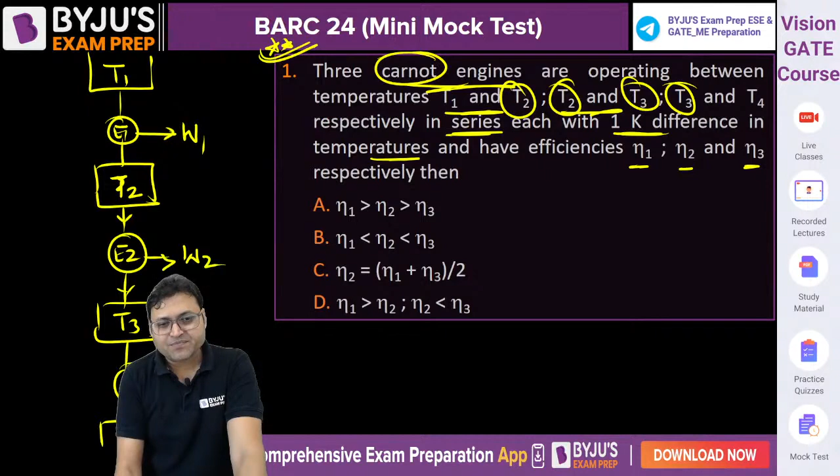So what is the thermal efficiency of an engine? The thermal efficiency is given by the work output upon heat input. What will be the thermal efficiency? Net work output upon heat supplied.

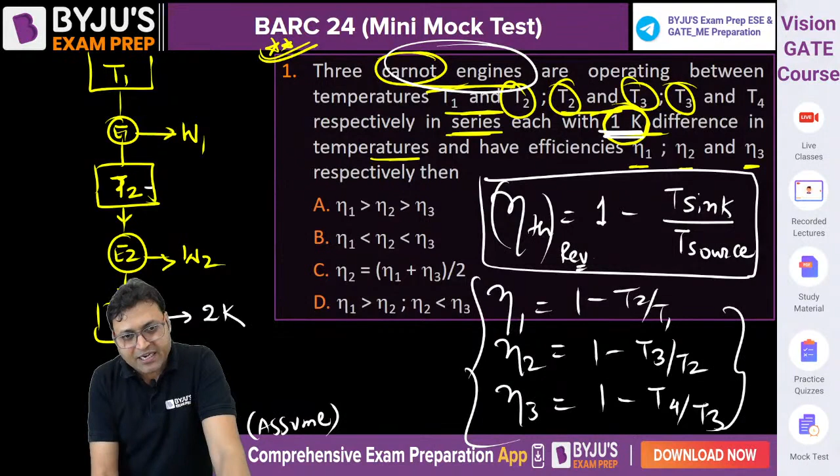Thermal efficiency for the engine 1, then what will be the answer? For engine 1, thermal efficiency क्या होगा? 1 minus T2 by T1, 3 by 4. Efficiency of 2 होगा 1 minus T3 by T2, that is 2 by 3, and thermal efficiency for the third engine will be 1 minus 1 by 2.

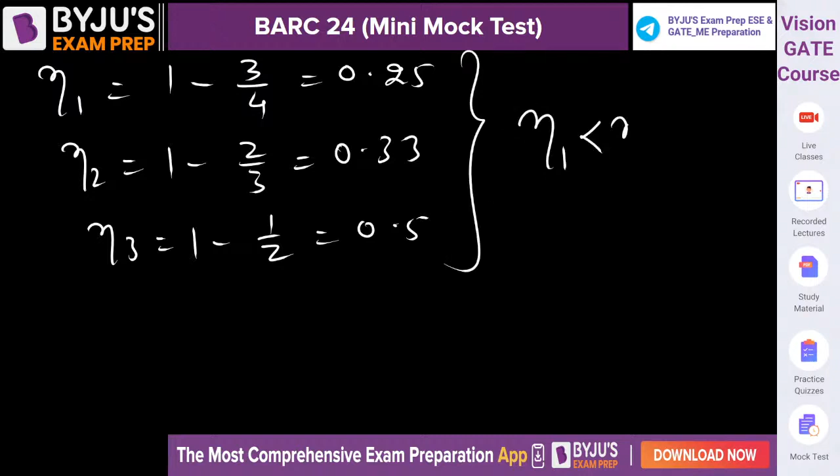Is this all clear to everyone? So the correct option is option B. Is this clear? Give me yes, everybody.

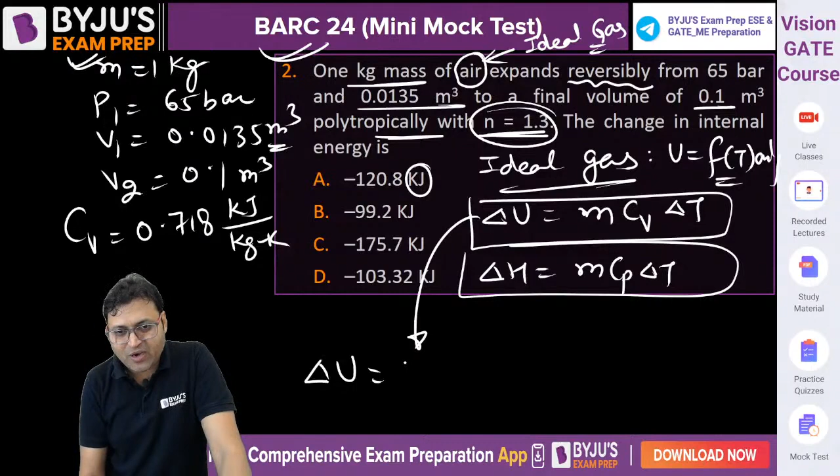T1 कैसे मिलेगा? P1 V1 is equal to m R T1. So from here T1 will be equal to P1 V1 upon m into R. Pressure at 1 क्या है? 65 बार. 65 into 100 किलो पास्कल. 1 बार is equal to 10 to the power 5 पास्कल, into V1. वॉल्यूम 1 क्या है? 0.0135. m R कितना होता है?

0.287. What is the value of R? R will be equal to 0.287 kilojoule per kg Kelvin. So the temperature T1 will come out to be, what is the value of T1? Are you getting 305.8 Kelvin? Please do let me know.

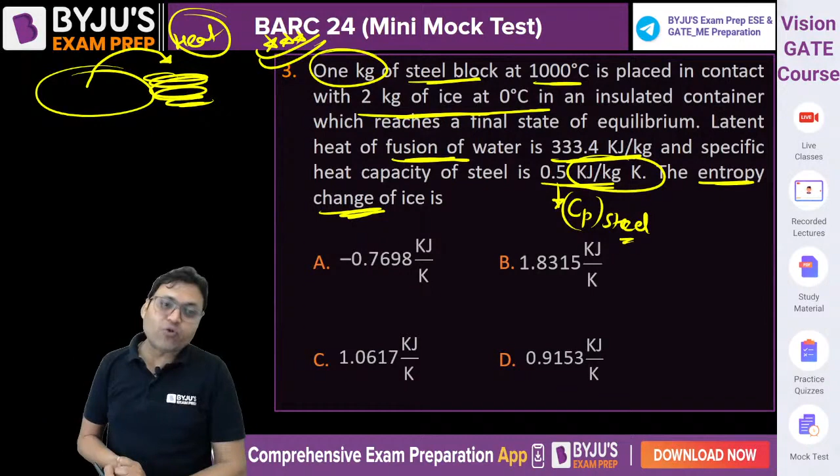If heat supplied by the steel block is more than the heat required for complete conversion of ice into water, then what will happen? After the ice completely gets converted into water, the extra heat will heat the water beyond 0 degree Celsius. So the final temperature of the water will not be 0. So the first step is, let us find out heat required for complete conversion of ice into water.

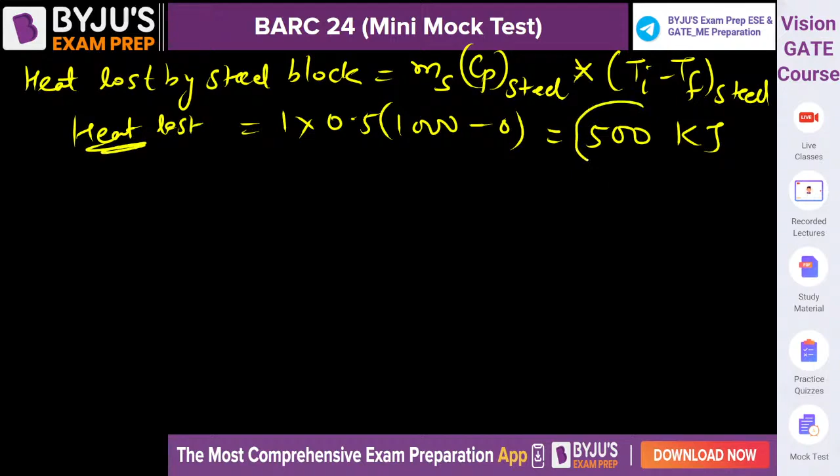अब ध्यान दीजिए कि heat lost by the steel block is 500 and heat required for the complete conversion of ice into water will be 666.8 kilojoule. Because the heat lost is less than heat required for complete conversion of ice into water.

होगा कि नहीं? बताइए. Do you agree or not? Give me yes. Everybody please give me yes if you agree.

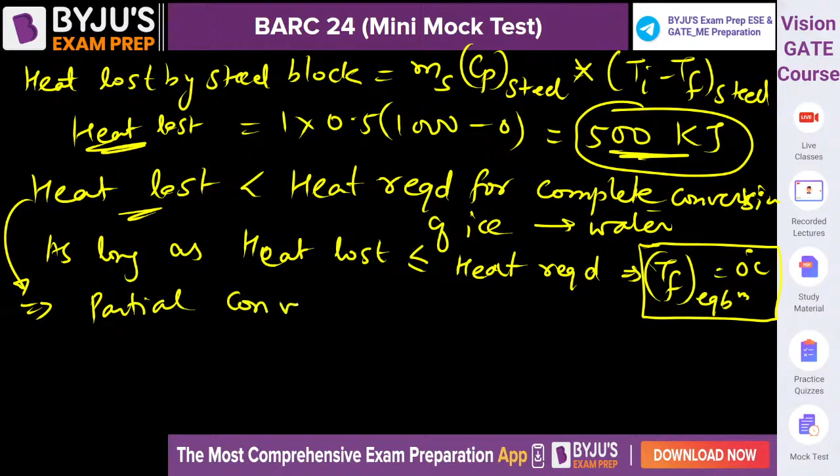Of ice into water. So there is a phase change, and because the ice is undergoing a phase change only, the change in entropy for the ice will be equal to Q supplied upon temperature of the ice, Q by T. What is the heat supplied? That is equal to 500 kilojoule, divided by the temperature, that is 0 plus 273 Kelvin. Isn't it? That is the temperature.

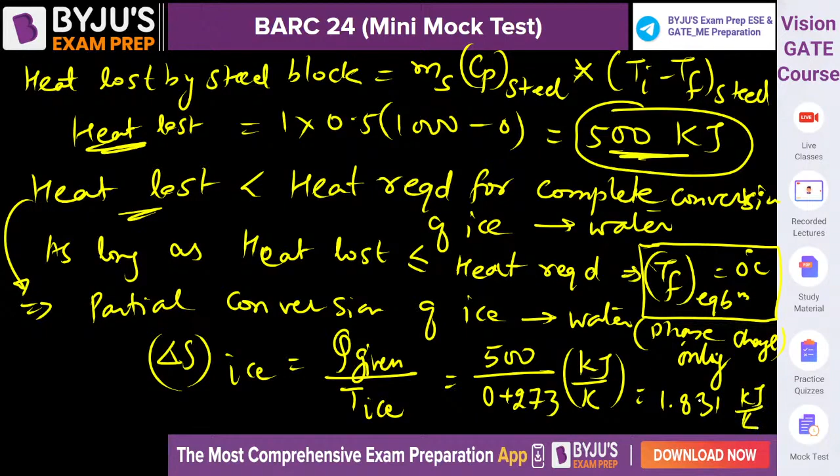Do you understand it or not? So the heat given is 500 kilojoule, and 500 by 273 will be the change in entropy for the ice block. 500 divided by 273. अगर किसी को कोई डाउट है, please do let me know. It is 1.831 kilojoule per Kelvin. 1.831 kilojoule per Kelvin will be the final answer.

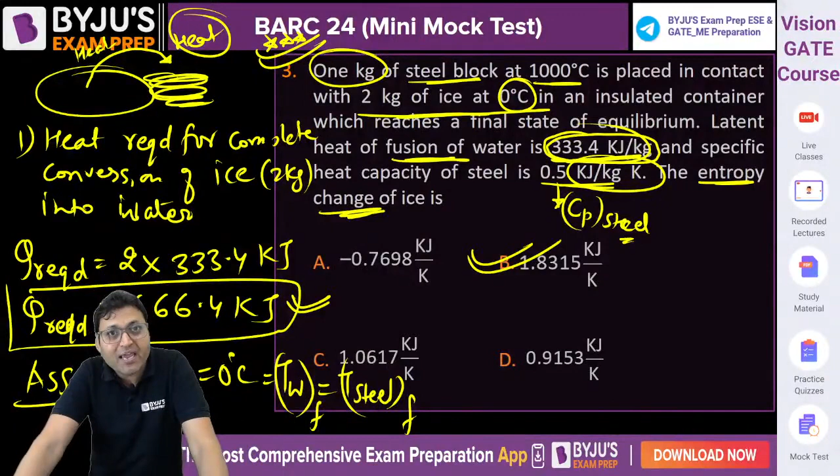पहला स्टेप क्या होता? Q means 666.4 divided by 273 plus mass of water into Cp for water into natural log of final temperature of water upon initial temperature, that is 0 degree. Whenever there is a phase change, then the temperature remains constant. उस केस में change in entropy is calculated by simply Q by T. अगर टेम्परेचर चेंज हो रहा होता तो the change in entropy is calculated by mc ln of T2 by T1. I hope this is clear.

If Q lost would have been greater than Q required, तब क्या होता? For an example, ये 1000 किलोजूल and ये 666 किलोजूल. So हम बोलते change in entropy for ice, यहां से 333 kilojoule would have been mass of water into 4.18 into T final minus 0. ये होता, और ये भी फिर चेंज होता.

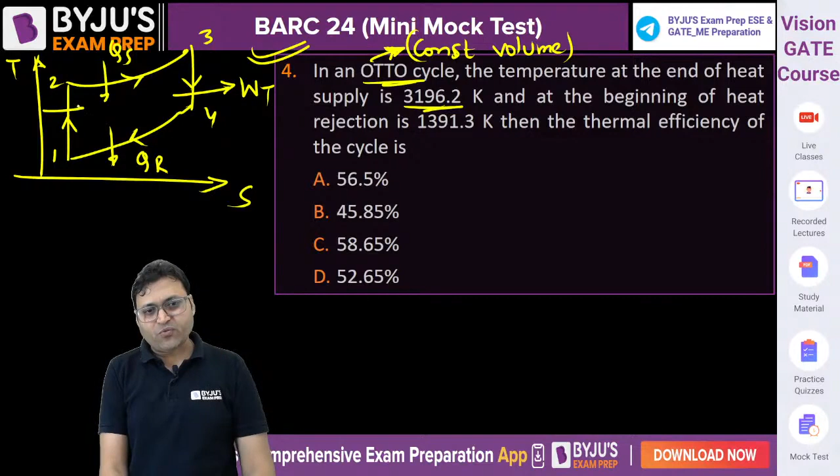In an Otto cycle the temperature at the end of the heat supply, T3, is given as 3196.2 Kelvin, right? And at the beginning of the heat rejection, T4 is equal to 1391.3 Kelvin. Then what will be the thermal efficiency of the cycle? Thermal efficiency of the Otto cycle is given by 1 minus 1 upon R to the power gamma minus 1.

And we know 1 to 2 is isentropic and 3 to 4 is isentropic. T3 by T4 is equal to T2 by T1, equal to R to the power gamma minus 1. R is the compression ratio, volume before compression upon volume after compression, V1 by V2. So T3 by T4 can be replaced in place of R to the power gamma minus 1. So thermal efficiency of Otto cycle is 1 minus 1 upon T3 by T4, or we can write it as 1 minus T4 by T3.

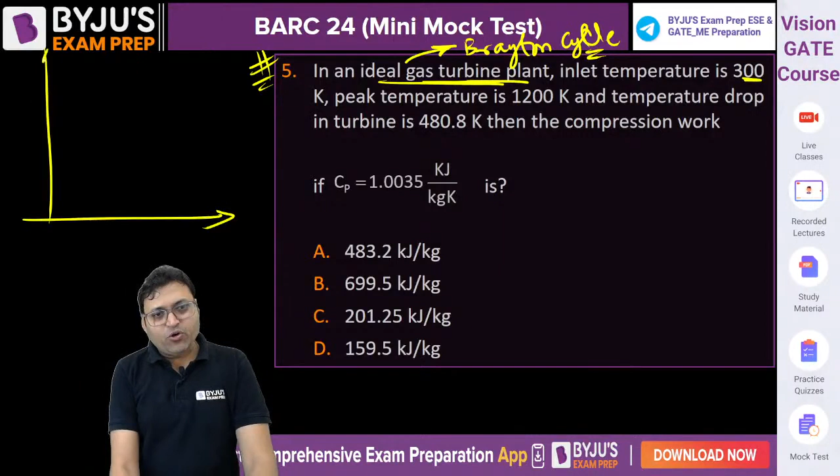It is also known as constant pressure cycle. Inlet temperature is 300 Kelvin. If we draw temperature versus entropy diagram, 1 to 2 is isentropic compression, similar to Otto cycle. 2 to 3 is constant pressure heat addition, 3 to 4 is again isentropic expansion, and 4 to 1 is constant pressure heat rejection. This is P1, this is P2. This is how the Brayton cycle looks like.

The inlet temperature is the temperature at inlet to the compressor. T1 is given as 300 Kelvin. Peak temperature, the maximum temperature is T3, given as 1200 Kelvin. What is the meaning of temperature drop in the turbine? Turbine is a work producing device. 3 to 4 process is happening in the turbine, and there is a drop in temperature. So T3 minus T4 is 480.8 Kelvin. What will be the compression work? 1 to 2 is compression work.

From steady flow energy equation, compressor is a steady flow device. There is no heat transfer, and compression work is H2 minus H1, and it is an ideal gas. For an ideal gas, H is a function of temperature only, so we can write it as Cp into T2 minus T1. That is the compression work per kg. Cp is already given 1.0035. The question is to find out T2 and T1.

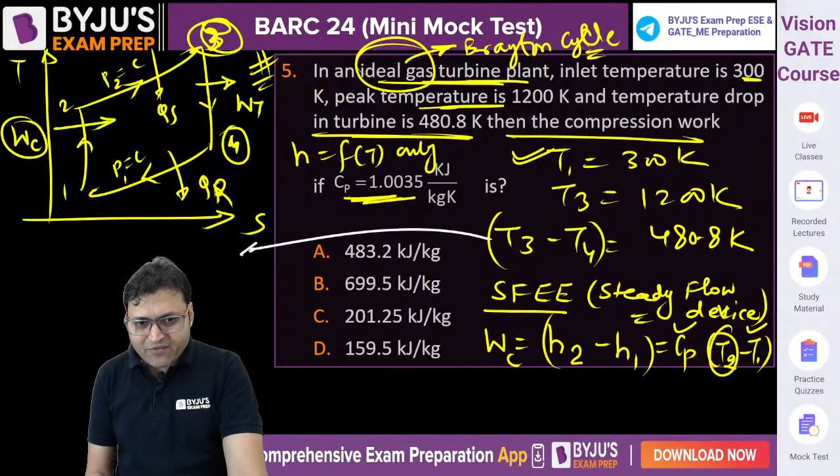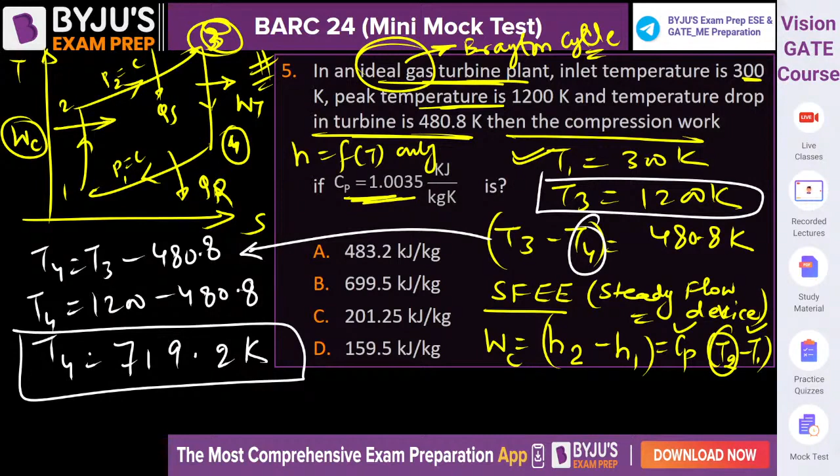How to find out T4? T4 is equal to T3 minus 480.8 Kelvin, that is 1200 minus 480.8, which comes out to be 719.2 Kelvin. Now T2 is equal to T1 T3 upon T4. T1 is 300, T3 is 1200, and T4 is 719.2. So 300 into 1200 divided by 719.2 gives 500.55 Kelvin. Are you getting T2 as 500.5 Kelvin?

And then W compression, the specific work, is given by Cp, 1.0035, into T2, 500.55, minus T1, that is 300, in kilojoule per kg. Do the calculation and find out the answer.

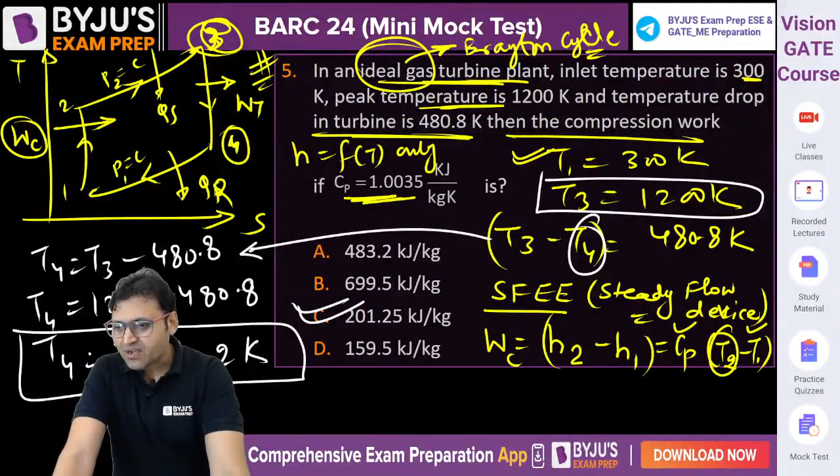201.26 kilojoule per kg will be the answer. 201.25 or 26. C is the right answer for question number 5. Is this clear? All set? Any confusion, any doubt? Beautiful question it is.

Question number 6. Whoever answers this question, it means your concepts are very much clear for thermodynamics. You are fully ready for cracking the BARC 2024 examination. Let us read the question, try to understand it and give the answer.

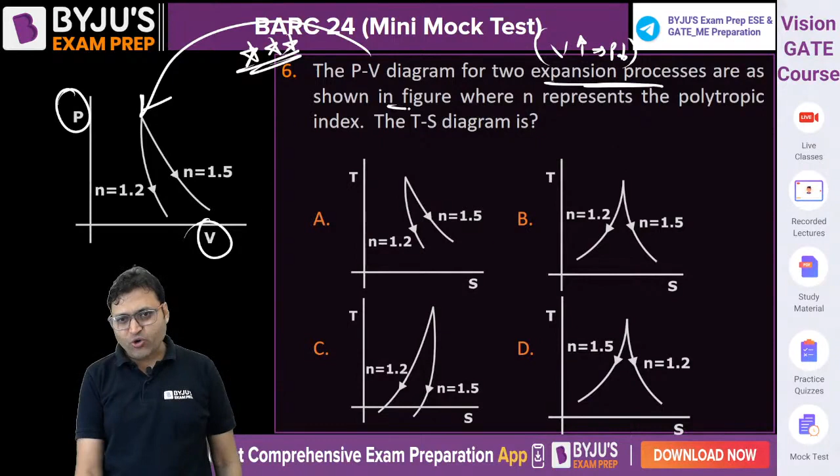For process 1, the polytropic index is 1.5, and for polytropic process 2, the value of polytropic index is 1.2. The TS diagram for these two processes will be, we have to draw the temperature versus entropy diagram for this.

Look, if PV to the power n is constant, then for n greater than 1, it can be polytropic index, it can be adiabatic index. For n greater than 1, if there is a decrease in pressure, there is an increase in volume and there will be a decrease in temperature. Yes or no? If there is an increase in pressure, there is a decrease in volume and there will be an increase in temperature.

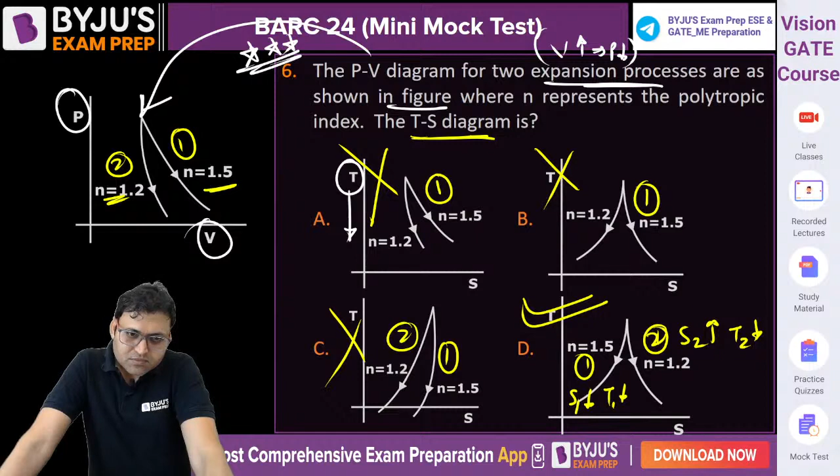Can you get the answer? Can you obtain option D? How you are going to obtain option D? If you will use the slope concept. For the process 1, temperature must decrease and entropy must decrease. It means slope is positive.

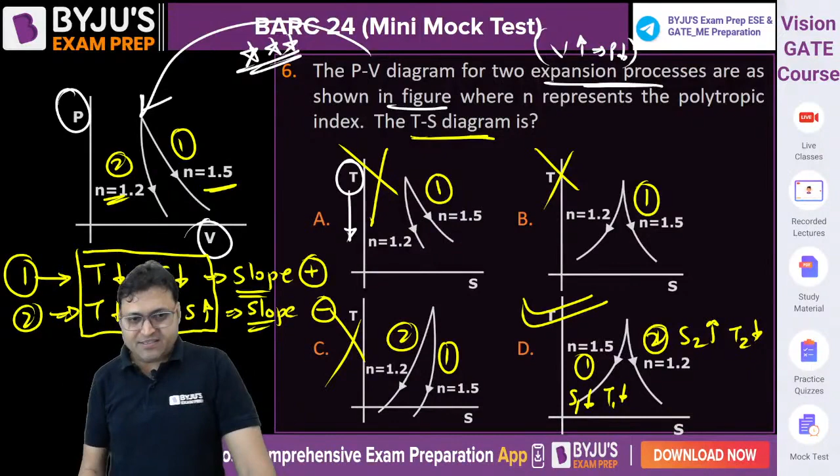Slope is positive, right? For process 2, temperature is decreasing but entropy will increase. So the slope is negative. Yes, that is what we can do. But for that you need to find out these two relations. Look, slope क्या कहता है? dy by dx is the slope.

If x increases and y increases, or if x decreases and y decreases, then the slope is positive. And how is the slope negative? By increasing x if y is decreasing, or by decreasing x if y is increasing, then the slope will be negative. So for the first process, slope of the TS curve will be positive. For the second curve on the TS diagram, the slope will be negative.

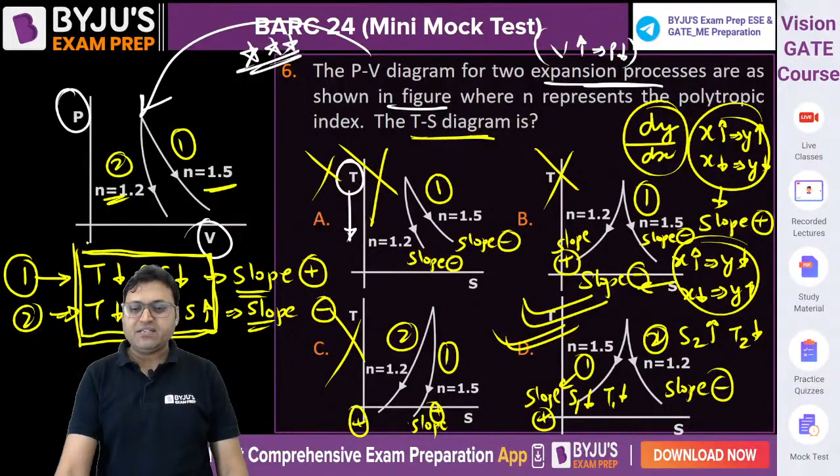In the final figure, the slope of first is positive and the slope of second curve is negative. And that is why option D is correct. Are you getting it, Shiva? That is how you can use the concept of the slope. But you need to get this relationship first, and that is obtained from the ideal gas equation for a polytropic process.

So the temperature will decrease because there is a decrease in pressure. So delta T is negative. Then we need to apply the heat transfer for a polytropic process, where the specific heat for a polytropic process is given by n minus gamma. The specific heat for a polytropic process can have a positive value, it can have a negative value.

So if N is greater than gamma, then C will be positive. If N is less than gamma, then C will be negative. So from here we can find out Q for a polytropic process, and based on that we can find out the change in entropy, whether it is negative or positive.

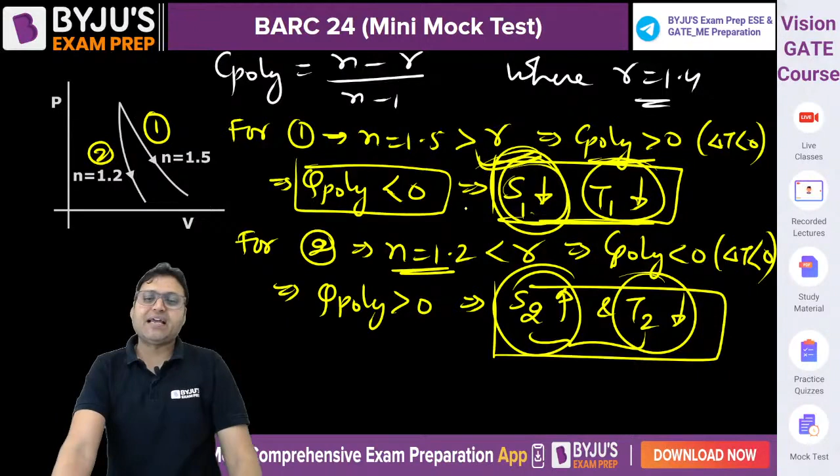I hope this is clear, Shiva. Is this all fine now? Let us move to the next one. This is how the questions are going to be asked. You need to read the question carefully and then apply the concept to get the final answer.

Agla question. The work of 146 kilojoule is performed in order to compress 1 kilomole of the gas. The work is done on the system. As the language suggests, the work is done on the system. कितना वर्क किया गया है? 146 kilojoule. So W is negative, isn't it? Work done on the system is negative. In order to compress, compression work is always negative. In order to compress 1 kilomole of the gas, the number of moles is 1 kilomole. N is equal to 1 kilomole.

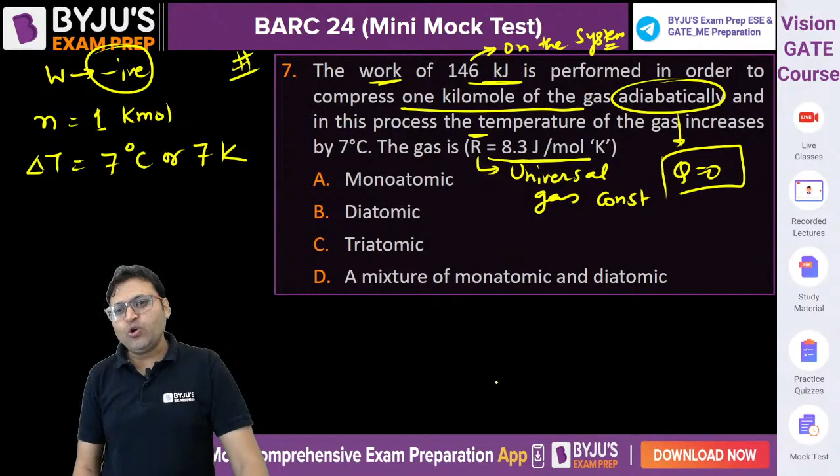Adiabatically, what is the adiabatic process? Q is equal to 0. There is no heat transfer, thermally insulated system. And in the process, the temperature of the gas increases by 7 degrees Celsius, or we can also call it 7 Kelvin. R is the universal gas constant, R bar. They must have mentioned it. It is universal gas constant 8.314, 8.3 joule per mole Kelvin, or we can call it 8.3 kilojoule per kilomole Kelvin. So ये gas monoatomic, diatomic, triatomic?

Gamma for monoatomic is 5/3, that is 1.66. Gamma for diatomic 7/5, that is 1.4. Gamma for polyatomic, that is 4/3, that is 1.33. So we need to find out the value of gamma. The question is to calculate the value of adiabatic index for the given system.

So if we apply first law, because work done is given and heat transfer is also given, according to first law, Q is equal to delta U plus W. Q is equal to 0. So delta U is equal to minus W, and W is already negative, that is minus of minus 146 kilojoule. So delta U is equal to 146 kilojoule, which is equal to M into CV into delta T. Can we write MCV delta T?

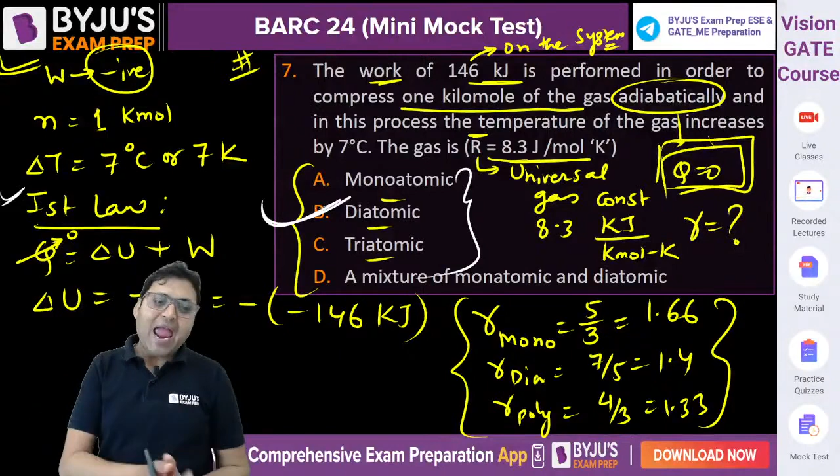So सबसे पहले क्वेश्चन को पढ़ के ये समझ में आना चाहिए, how to find out whether it is monoatomic, diatomic or triatomic. The value of the adiabatic index or specific heat ratio gamma decides whether the gas will be monoatomic, diatomic or polyatomic. So how to find out gamma? From the first law of thermodynamics, we can develop a relation between delta U and W. W is given, so delta U is equal to minus W, and delta U can also be written as MCV delta T for an ideal gas.

Let us move to the fluid mechanics questions then quickly.

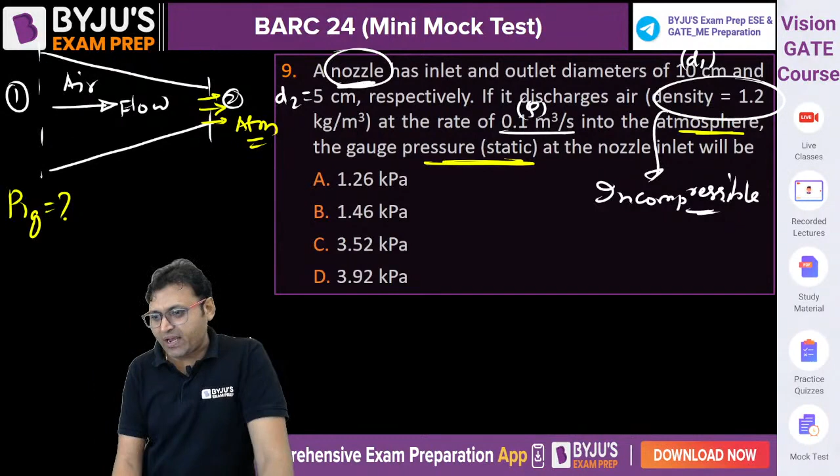We need to find out gauge pressure at 1. Can you do it? First, if we apply the mass conservation equation, if we use the continuity equation, Q is equal to A1V1 is equal to A2V2, that remains constant. So we can say D1 square into V1 is equal to D2 square into V2. D1 is given as 10, D2 is given as 5. So V2 will be equal to 4V1, and V1 can be calculated by 4Q by pi D1 square.

We can calculate V1. So V2 is equal to 4V1. That is our expression number 1. If we apply the Bernoulli equation between 1 and 2, in terms of pressure, we can say P1 plus rho V1 square by 2 plus rho g Z1 is equal to P2 plus rho V2 square by 2 plus rho g Z2. Yes or no? Because Z1 is equal to Z2. The nozzle is horizontal.

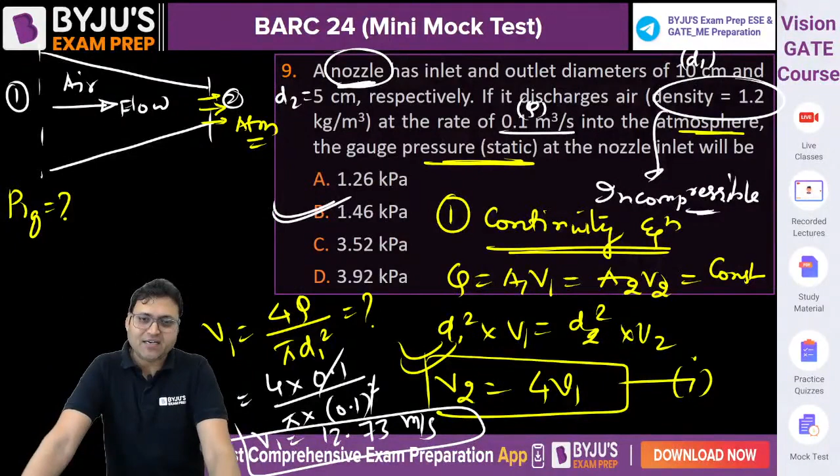So it is 15/2 into 1.2 into 12.73 whole square, which will give you the answer for gauge pressure at 1: 7.5 into 1.2 into that. 1459.025 pascal, and in kilo pascal, 1.459 kilo pascal will be the answer. Yes, Ravneet, well done. The answer to this question is option B. B will be the correct answer. All right. Very nice. Good.

Keep it up, everybody. The next one is question number 10. Question says, consider incompressible flow, means density is treated as constant, through a two-dimensional open channel. At a certain section AA, this is the section AA, the velocity profile is given by this parabola. This is the parabolic velocity profile. Neglecting air resistance at the free surface, this is the free surface, find the volume flow rate per unit width of the channel.

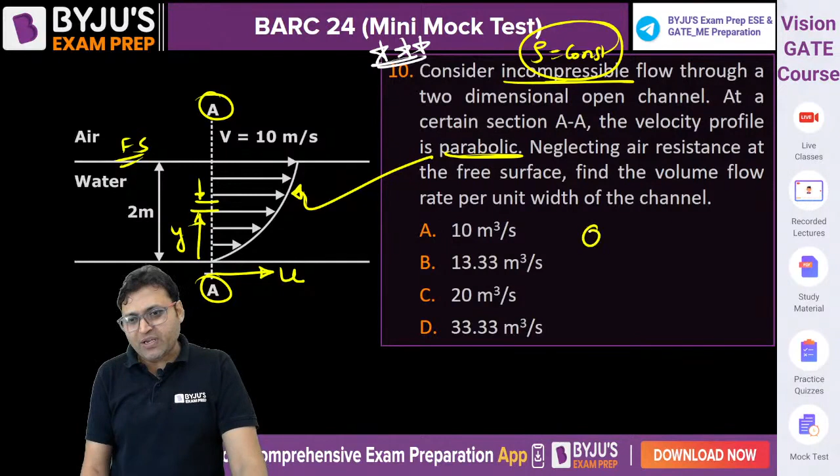Let me call the velocity U and this is Y. So what do we need to find out? We need to find out the discharge. Q is equal to area into velocity, but V is variable. So we can say Q is equal to integration of U into dA. Isn't it? U will be a function of Y. So at any Y, if we take a dy element, Q is equal to integration of U as a function of Y into dy, and the limit of Y will be from 0 to 2. Yes or no? Can you do it?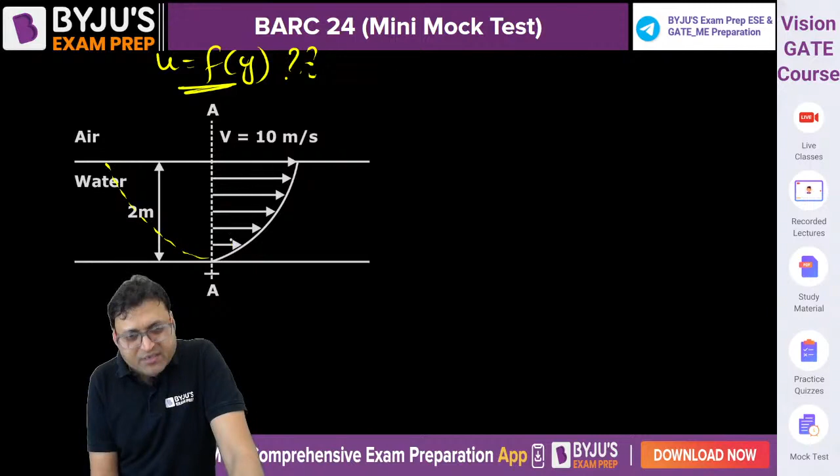Now our objective is to develop a relation between U as a function of Y. Here students commit the mistake. If you see, this is an upward open parabola. It opens upward. It means Y is always positive. So we can say Y is equal to A into U square is the expression of the parabola. Yes or no? This will be the expression of the parabola.

Y is equal to AX square and X is equal to U. It is the curve between U and Y, not X and Y. This curve is Y given by AX square. Here people commit mistake. They start writing U is equal to AY square. That is not correct. Y is given by AU square. So at Y is equal to 2, U is equal to 10 meter per second. So 2 is equal to A into 10 square. So what is the value of A? A is equal to 2 by 100, 1 by 50.

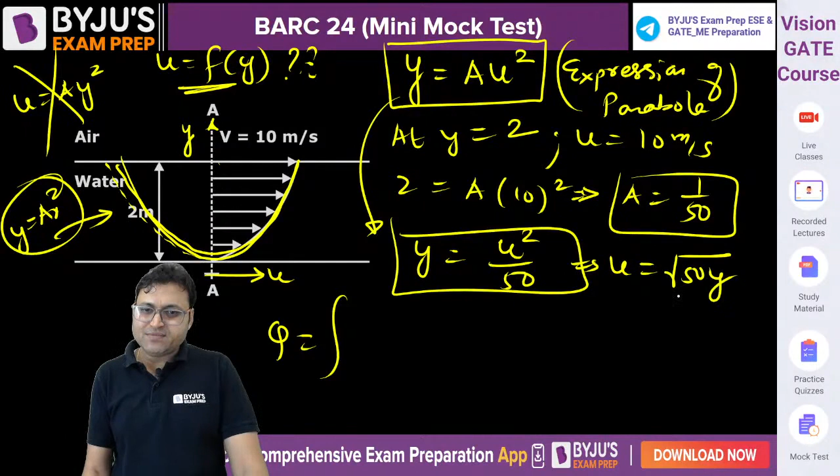So Y is equal to U square by 50. Yes or no? So Q is equal to integration, or from here U can be written as under root of 50Y. So U into dy, integration of under root of 50Y into dy, and the limit will be from 0 to 2, will give you the final answer. Isn't it?

Can you do the calculation? Q is equal to under root of 50 taken outside, under root of y dy. What is the integration of under root of y dy?

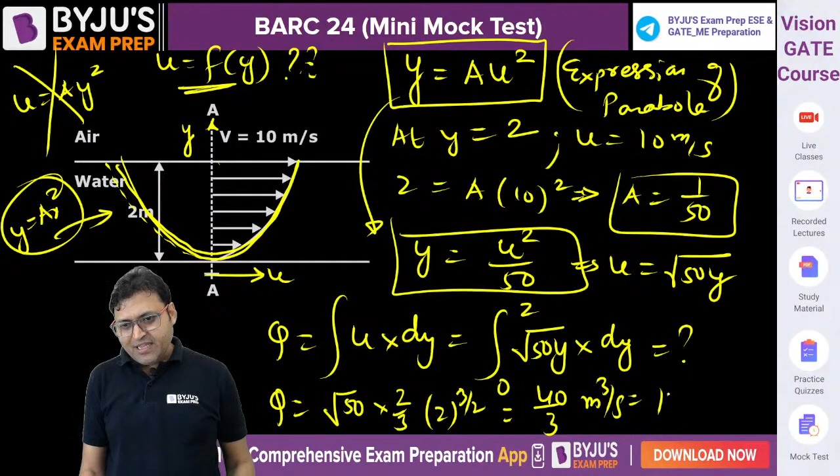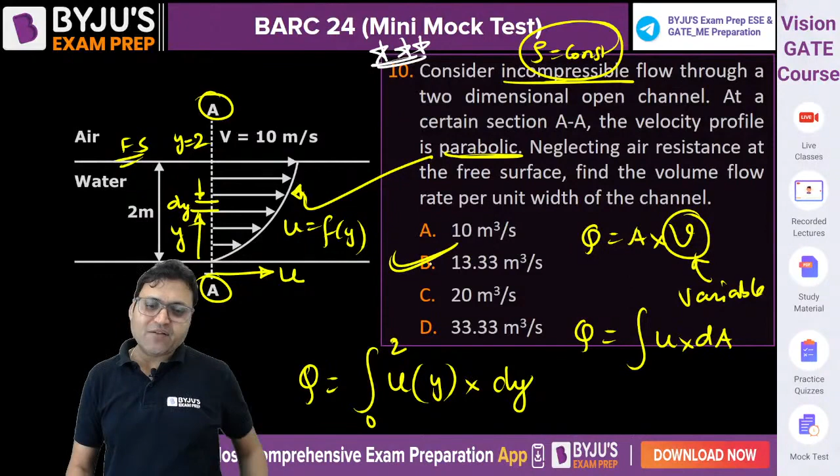2 to the power 3 by 2, multiplied by 2 multiplied by root 50, divided by 3, that is 40 divided by 3 meter cube per second, that is 13.33 meter cube per second will be the discharge. The question is simple. The only thing is you should be able to find out the expression for u as a function of y correctly. B is the right answer. All right,

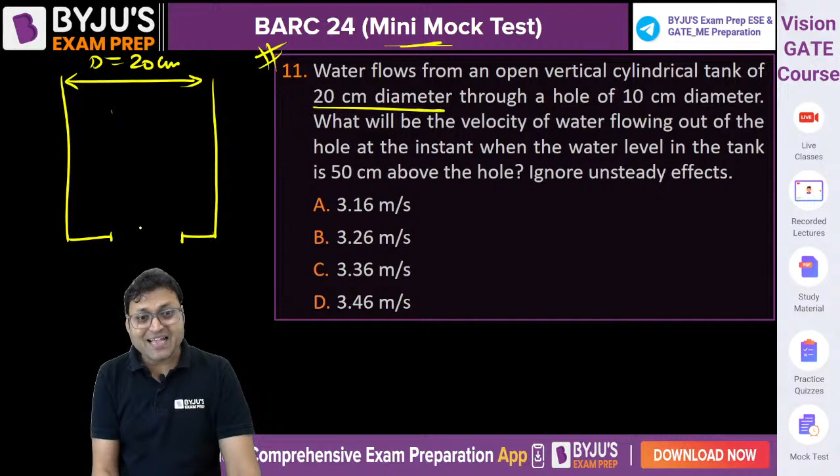All right. The question says water flows from an open vertical cylindrical tank. There is an open cylindrical vertical tank of 20 centimeter diameter, through a hole of 10 centimeter diameter. This is the hole. 10 centimeter का तो hole ही है. D is equal to 10 centimeter. It is not a hole. We should not call it a hole, क्योंकि इसका तो diameter भी काफी है.

What will be the velocity of water flowing out of the hole at the instant when the level of water in the tank H is equal to 50 centimeter above the hole? Ignore the unsteady effects. Now, how many of you think that it will be given by under root of 2gh? Torricelli's equation. How many of you think the velocity from the hole will be root 2gh?

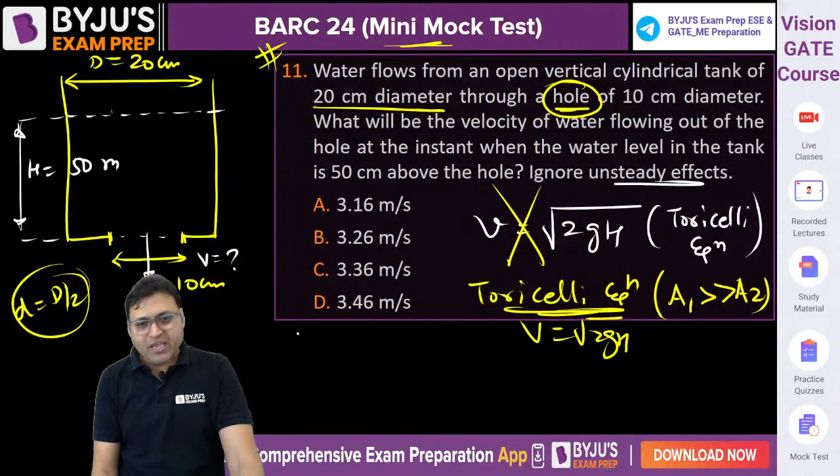So if we apply the continuity equation, here the velocity is, let us say v1, this is point 1, here the velocity is v2, this is point 2. Q is equal to a1 v1 is equal to a2 v2 is equal to constant, because the flow is steady. So d1 square into v1 is equal to d2 square into v2. Capital D is 20, small d is 10, half. So v2 is 4 times of v1.

And now if we apply the Bernoulli equation between 1 and 2, P1 by rho g plus Z1 plus V1 square by 2g is equal to P2 by rho g plus Z2 plus V2 square by 2g. Z2 is equal to 0. Z1 is equal to H is equal to 50 meter. P1 and P2 are equal to P ATM, both are at atmosphere.

So H plus V1 square by 2g is equal to V2 square by 2g. So from here we can find out V2 square is equal to V1 square plus 2gH.

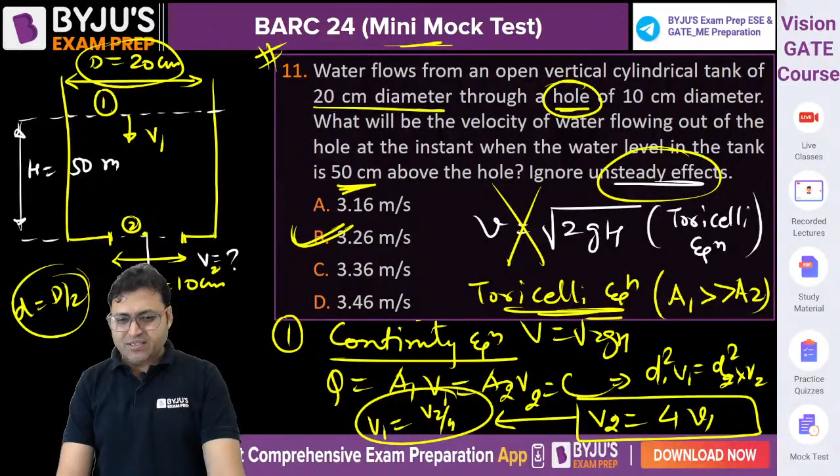Why am I getting 50 centimeter? It is 50 centimeter, sorry. So 0.5. 3.234. Yes, Ravneet, well done. 3.23. B will be treated as the correct answer, because we have taken G as 9.81. If we take G as 10, then it will be 3.26, right?

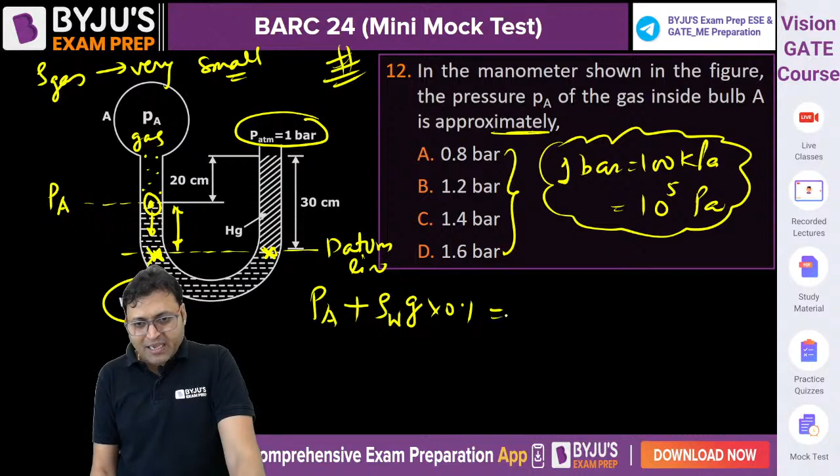We are traveling in water. Density of water into G into how much is this distance? 30 minus 20, that is 10 centimeter, that is 0.1. Is equal to the outside pressure, P ATM. From P ATM we are traveling in downward direction, plus now we are traveling in mercury, into G into 30 centimeter, that is 0.3 meter. PA absolute is equal to P ATM, 1 bar, plus if you put the values in their SI unit, you will get Pascal.

13.6 into 10 into 0.3, that is kilopascal, upon 100, minus 1 into 10 into 0.1 upon 100, that will be bar. What is the answer? 1 plus, 100 getting cancelled out, so 1.36 into 0.3, 0.408, minus, this 0 is getting cancelled out with this 0, 0.01 bar. This much will be your answer.

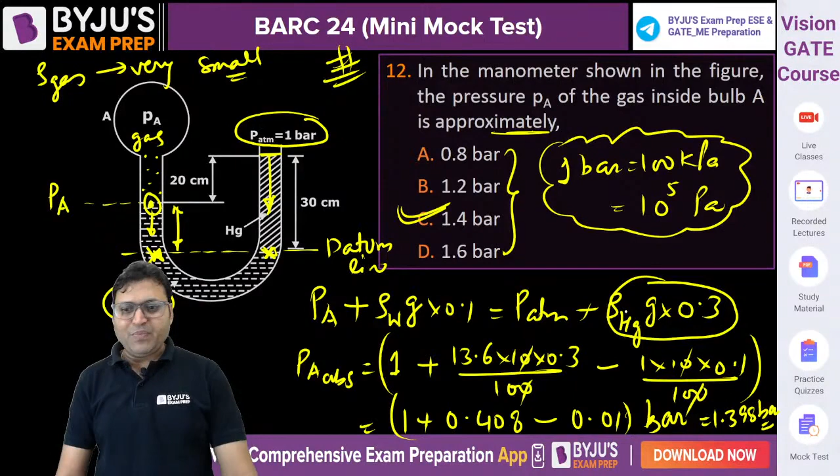So 1 plus 0.408 minus 0.01, 1.398. Sorry, it is 1.398, that is almost 1.4 bar. That is 1.398 bar. Do not miss the units here. That will be the answer.

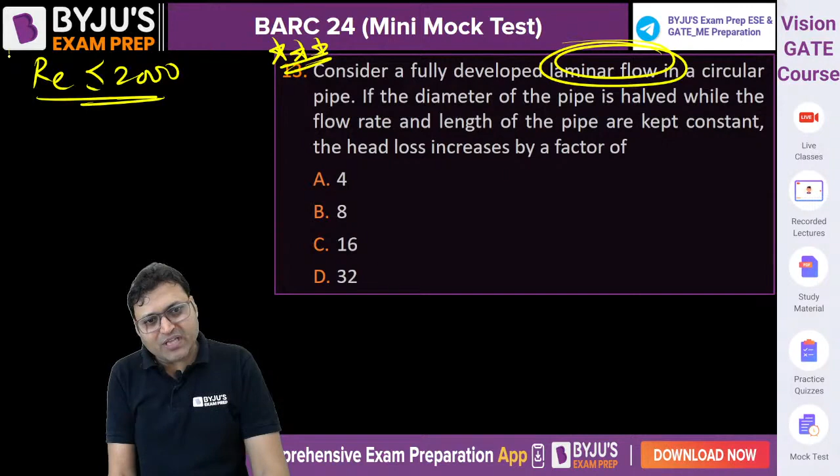Question number 13, wonderful question, on the screen. Consider a fully developed laminar flow. What is the meaning of laminar flow? When the Reynolds number is less than 2000, the flow is laminar, right? For laminar flow, the friction factor is given by 64 by Reynolds number. We can use the Hagen-Poiseuille equation. The maximum velocity is twice the average velocity.

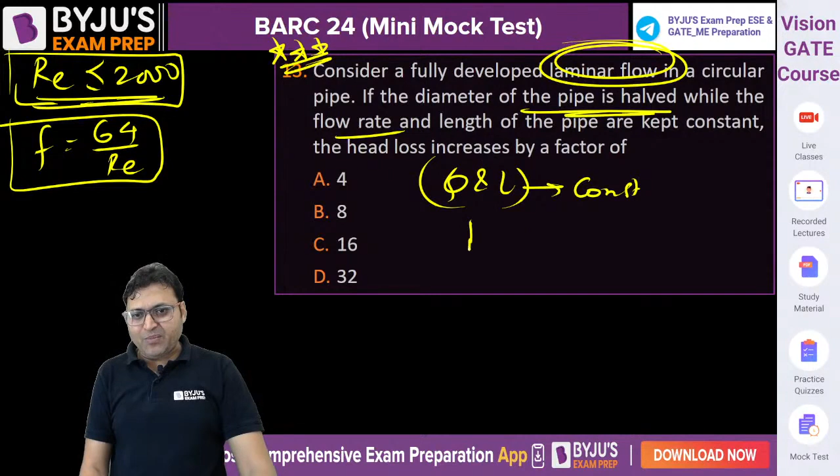These are the things. If the diameter of the pipe is halved while the flow rate Q and length are constant, what will be the change in head loss? We need to find out the head loss as a function of diameter. So what will be the change in head loss if D2 becomes half of D1? Then HL2 by HL1 is how much? That is the question.

So the question is to develop a relation between HL and diameter. For laminar flow, HL is given by FLQ² upon 12.1 D to the power 5. Discharge is constant, length is constant, 12.1 is constant. So we can say HL is proportional to F by D to the power 5. And F is equal to 64 mu upon rho VD. Or we can say 64 and mu is constant, this is constant.

So from here we can write, F is inversely proportional to V into D. And velocity is given by 4Q by pi D². So Q is constant, velocity is inversely proportional to D². If we put velocity here, 1 by D², and if we put F here, then from here we will get F is proportional to D² by D. So F is directly proportional to D.

If we put it here, then HL is proportional to D upon D to the power 5. So HL is inversely proportional to D to the power 4. That is the final relation. Or we could have used the Hagen-Poiseuille equation, HL is equal to delta P upon rho g. That is 1 by rho g. Delta P is 32 mu VL by D².

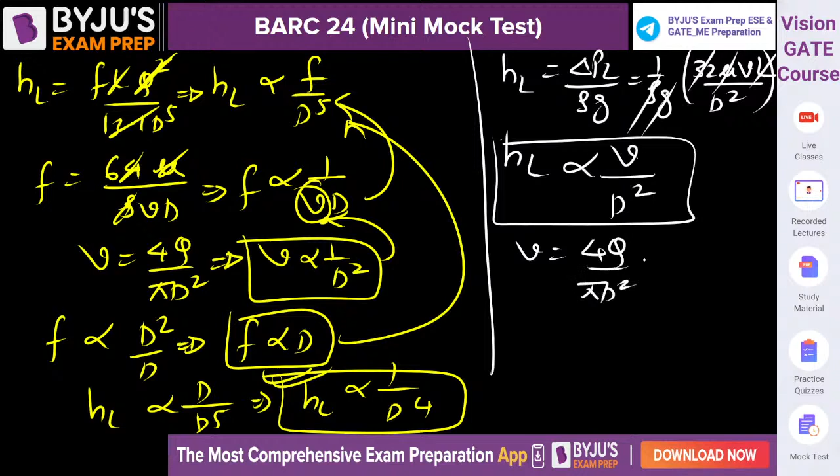So from here, rho is constant, g is constant, 32 is constant, mu is constant, length is given constant, so HL is proportional to V by D², and V is equal to 4Q by pi D². So we can say V is inversely proportional to D². Put it here. So HL is inversely proportional to D to the power 4. Whether we use Darcy-Weisbach equation or Hagen-Poiseuille equation, you will get the same result.

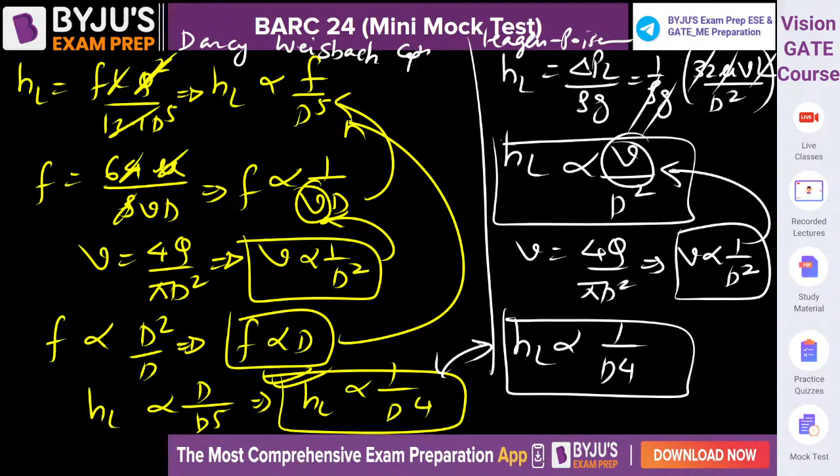So the final expression is HL is inversely proportional to D to the power 4. So HL2 upon HL1 is equal to (D1 by D2) to the power 4. D1 is twice of D2, so 2 to the power 4. 16 will be the answer. C will be the correct answer, right?